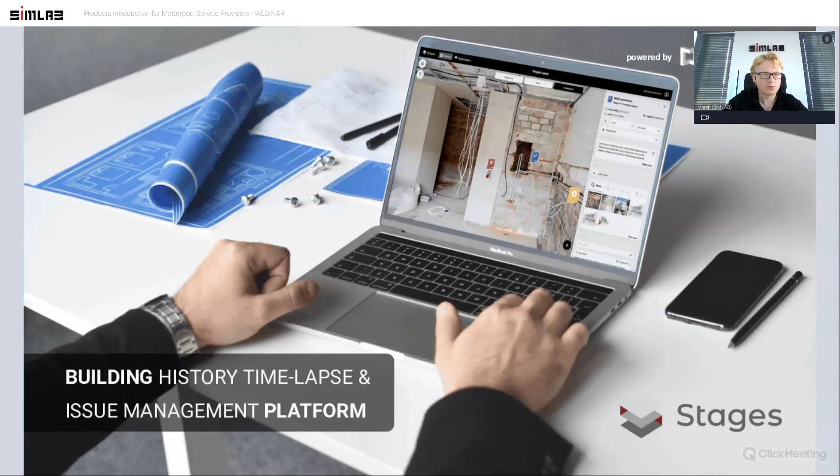If you're feeling that Stages and SIM-ON is a good part of your future business, we're gonna be more than happy for you to use it. For why to use Stages, for who it is, I'll just drop that part. That's something you might need later on to talk with your customers in written form, but you will see it live in a couple of seconds, so that's going to be more obvious to everybody.

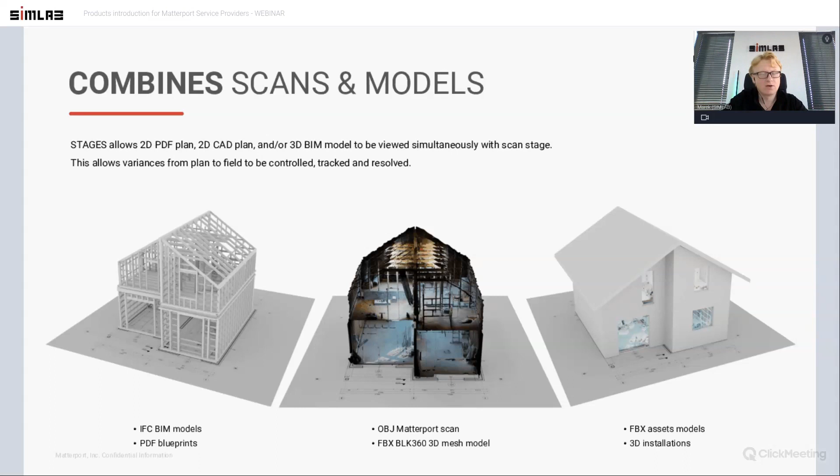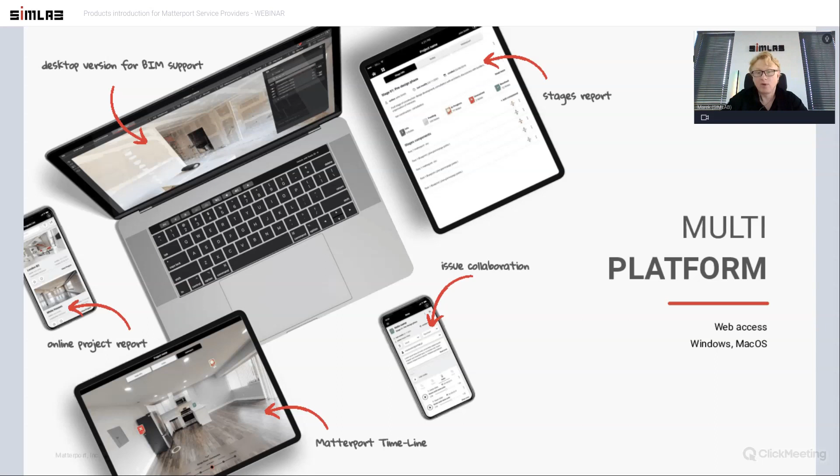Those slides show the concept of Stages, the main perspective of Stages, and also for SIM-ON, how to work with this, what kind of geometries, what's the main concept, what kind of data files we're able to load into the system, that it's multi-platform regardless of the operating system, because it's web technology, you can basically use those lines.

Even in our materials, we show a full description of the products, which is very important, because as you'll see in a couple of seconds, in the next part of the seminar, the product owners, and in this moment Robert, will show you the main difference and answer your questions about, for example, web version and standalone version.

That's what we have listed. Again, because of the time shortage, I don't want to go into the details, but I'll show you basically what's the main difference, and all those kinds of basic questions are answered in those materials, on the links my colleague has just copied to the chat window for you.

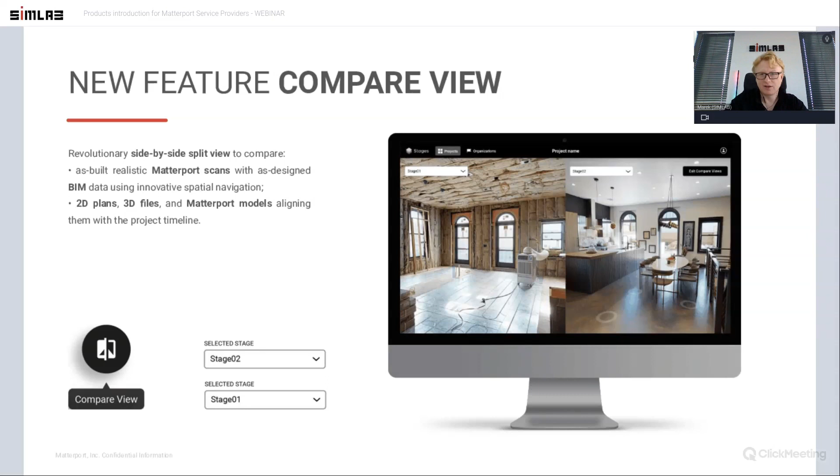The most useful and important features are all listed, so you don't have to worry how to talk or what arguments to use with your customers. It's in those materials. The most important thing, which I'll show you in a couple of seconds, is the split screen, which is the main hype and buzzword around the Matterport environments that we're hearing about and getting emails from you about, but this will be presented.

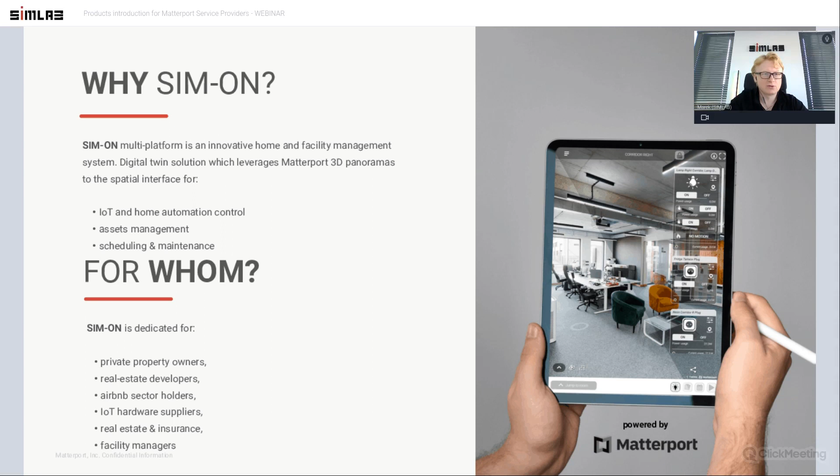The same colorful, nice marketing materials are prepared for SIM-ON. As you see, there's a lot of place to put your logos on those materials. So start using this. The same questions and answers, why SIM-ON, why it's needed, and for whom it is.

It's everything there. Although I'd like to show you that right now, because of our experience, we know that SIM-ON is also not correctly branded as the IoT or home automation system, because as Ivor has already mentioned, this is a system to run your facility on a daily basis. So there's a little bit of confusion. It's still one product, but if we're talking to customers who mostly work in facility management, we tell them that SIM-ON's got a facility management module and an asset management module.

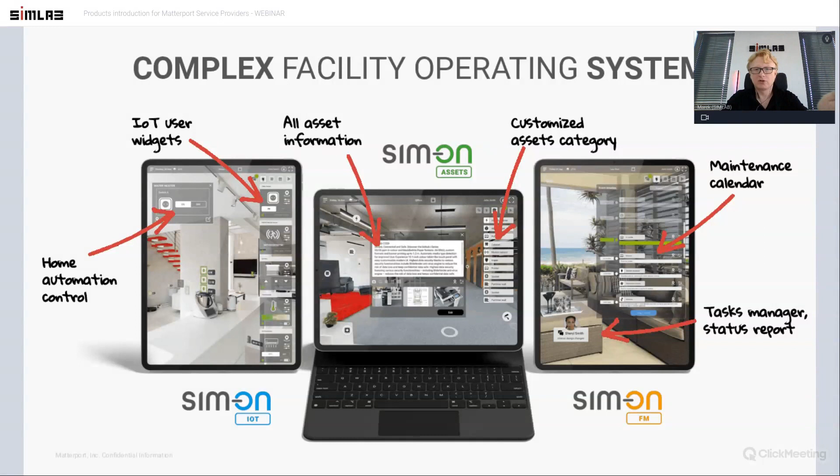If we're talking with, for example, service providers who are doing home automation installations around different regions in the world, they are mostly interested in IoT or home automation. So yes, there's a SIM-ON IoT version of it, although everything works in one bundle under the SIM-ON brand, and there is no additional pricing or cost for using FM, assets, or SIM-ON IoT. It's all one software, it's just about correct targeting and positioning the product on the market if we're talking about FM or asset management.

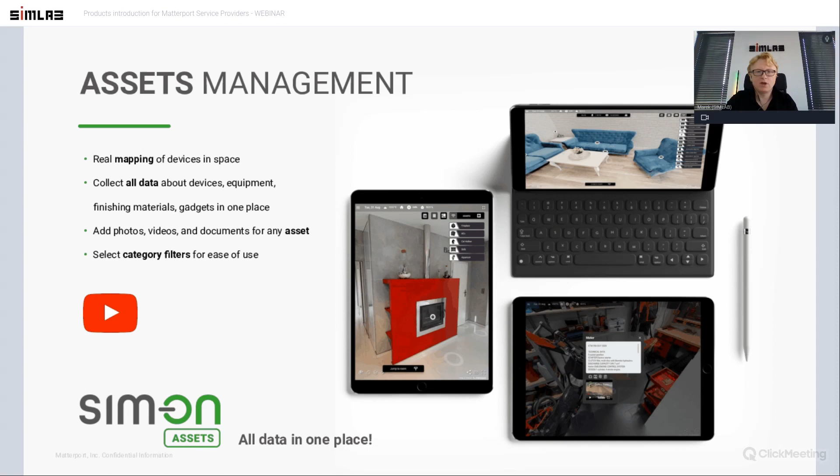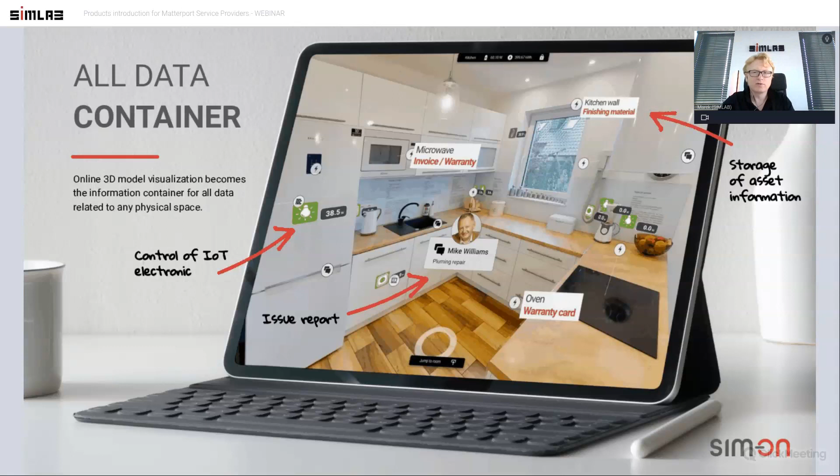So these are the benefits of each module, according to the materials. Everything is in the materials, once again, for your usage. You can click it, go through it, use those links right now, or just keep it with your materials. We are trying to make those graphics as universal as possible, so you can actually create this yourself.

Of course, for each of the products we have plans - subscription plans, enterprise plans - and also a concept for how to work with Matterport service providers to use those plans and share, for example, the revenue. But for that, I would like to come back to those slides.

At this moment, I would like to show you basically how the products look like, and what Stages and SIM-ON actually are, for those of you who are not registered yet on the platform and haven't seen this before live. Because seeing this in a video is one thing, but actually clicking through it yourself is another story - the ease of use of the software and toolkits is our biggest benefit for the end user, for the consumer, who gets a 3D Matterport model and is very excited with that model.

He can rotate it, put some tags, send it to family, send it to business partners. But the excitement of using those models drops down over the next couple of days, and after a couple of weeks he even forgets that he has a beautiful 3D digital twin of that facility. So to bring back this excitement, we created a product which allows you to use Matterport 3D scanned data for the full life cycle of the building.

From the very first beginning of construction, which is Stages, but also during daily operation, which happens during the daily activities of using IoT systems or facility management, and events where you need to change the filters in your air conditioning units - everything is held in our software.

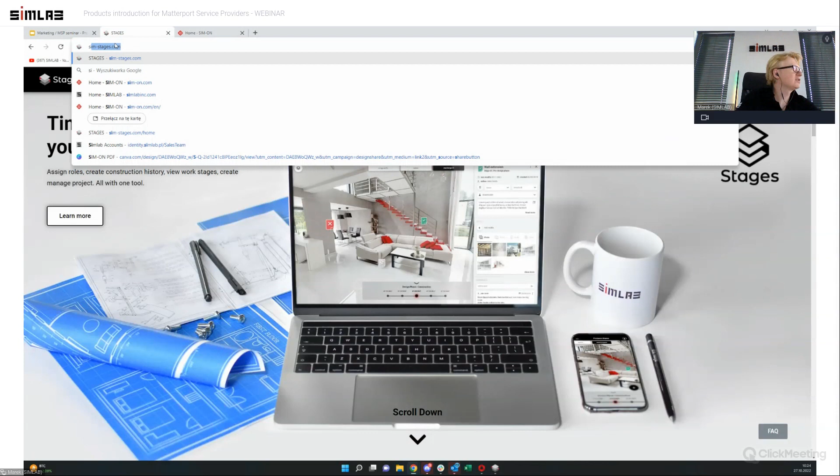So Stages - if you would like to try it, even right now or after the seminar, it's very easy. Let me just show it again. You go to sim-stages.com, and this is the landing page, which brings you straight to the product.

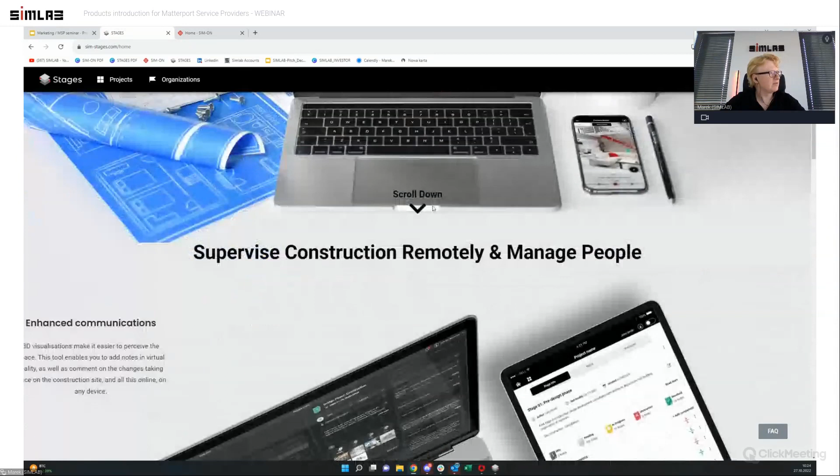The landing page is complete. It shows you the biggest benefits, some materials that you can copy from, some movies showing how it works, additionally some graphs and how to even start it. The basic tutorials, how to do the first demos for your customers or the first applications, are there. The differences between Windows, which is the desktop version, and the web version are also there, as well as the subscription plans on the website.

So it's a complete set of materials, but the most important thing is that the magic happens once you log in - this is my computer that I use on a daily basis, so I'm already logged in, but here in the top right corner there is a button to go straight to the login.

And once you log in, you see those two beautiful icons. One is projects, where all of your scanned data is held, and organizations, which allows you to share the same models with different collaborators in different companies working under one project on different levels and stages of those projects.

So let's go very fast, not to waste too much time. This is your dashboard, showing the projects created by you or shared with you for collaboration. Let's take the one I like most - this is one of our colleagues' apartments, and this is how it works when you actually load it in the first stages project. Everything is web-based, and there's a small button on the top left corner which opens the stages.

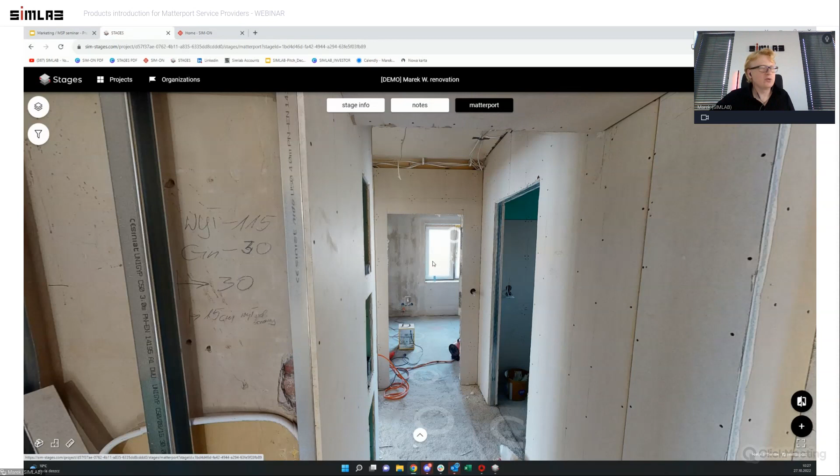One is called information - when this time frame was captured, you see it's the 19th of April 2022, when it was last modified, who was the author of the scanning, what's the description, and what kind of problems it shows. But the most important, of course, is the Matterport for all of us, because we are Matterport service providers. The reason we don't show Matterport at the beginning is that if you're on a construction site, you don't want to download a couple of megabytes to your mobile device. If you don't have a Wi-Fi plan with you, you just want to show what's happening on the construction, and I'll show you in a second.

So how the Matterport model works - I don't have to explain that this is a 3D model in a web browser, which is a revolutionary technology. But what's most important for all of you is that here, if we're in the Matterport model and we bring back the same stages description window, you can actually select the next model captured about the same facility, and it moves you in time to that particular model, staying in the same place and location.

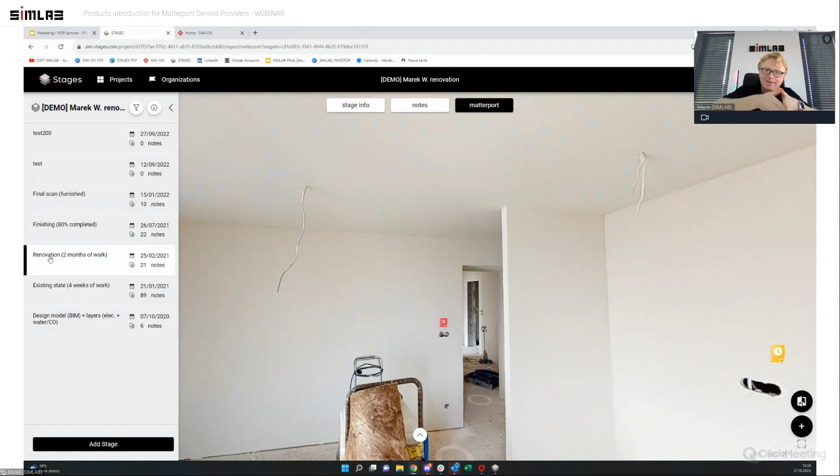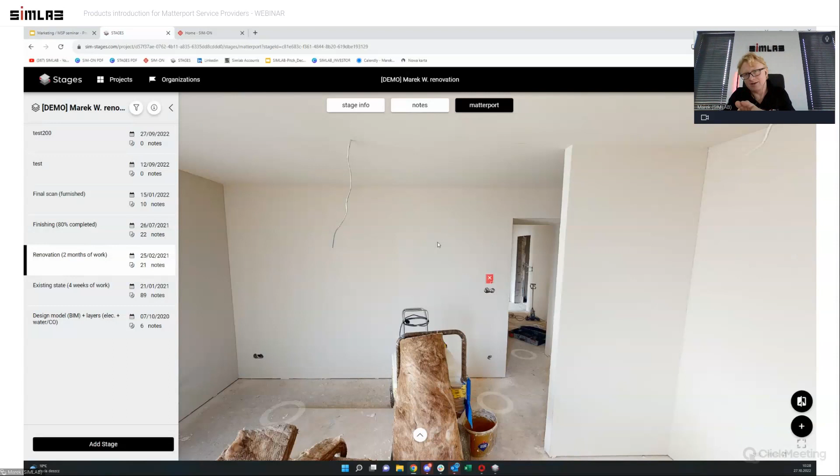So you see here I was looking at that wall, which had no gypsum boards yet, so I could see all of the installations, cables, and so on, and I was just transferred to the next model in the same place. And talking about the same place - it's not the same spot of putting the camera, because it's the closest one to where we were in the previous stage, but with the same focus of the camera and angle of view that I'm actually looking at.

So if I'm, for example, looking at that balcony window and I select the next one, you see the progress shown, and that's actually showing what's happening with that facility over time. You see the paint is being done, we have some first furniture coming in, and the lamps are in the facility. So this is basically how stages is named, because it's stage 1, stage 2, stage 3, and you can build a full life cycle of the building like this, even showing the aging of the building, or before and after an insurance removal, insurance problems captured before and after a disaster, or any kind of claim to the facility.

But that kind of jumping, it's one great story.

What we released a couple weeks ago, and some of you may have found out on social media, is a revolutionary new way of comparing scans with a split-screen window, this icon at the bottom. It brings up two side-by-side windows showing Matterport stage 1 and Matterport stage 2 of the same facility, and everything is synchronized.

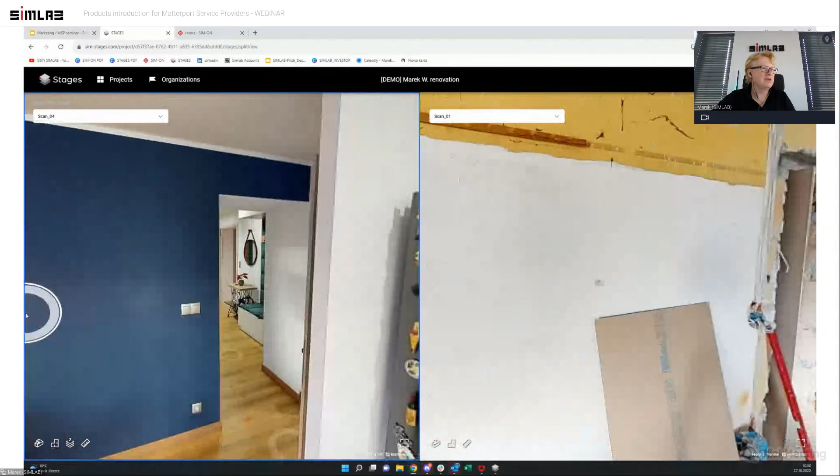Let's go to scan 1. This is a great example showing before renovation, where the cables are, and after renovation. Everything is synchronized, and this is something Matterport service providers were asking us for, so they can compare side by side with different models. If there are 20, 30, 50, or 100 scans of the same facility, it's easy to select the one that's interesting for you.

The synchronization of the walkthrough images in the Matterport model is seamless and works very smoothly. This is the biggest advantage for Matterport users who have more than one scan of the same facility. So this is basically how it works.

If I'm here in the corridor and want to see where the cables for installation are in the wall, these are the Superman eyes you can turn on to see how it works — it shows what was laid down before the wall was closed. Using this does not require any engineering knowledge, and creating an application like this with this effect also does not require engineering knowledge. Everybody can build these demos.

In the last session, Robert, who is the product owner and manager of the Stages product, will show you how to build this demo with 3-4 scans in just a couple of minutes. That's how easy it is.

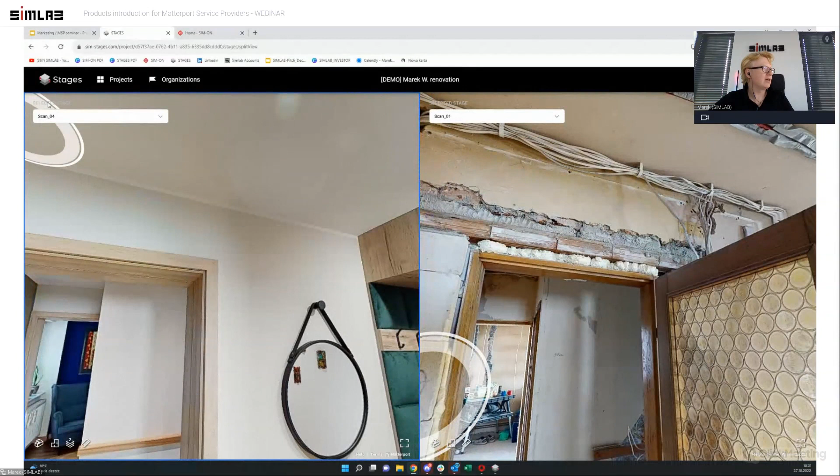So I can walk around the apartment and see how it was before and after, using a timeline shown on the left side panel, or with the compare view as shown here. That's basically why it's called Stages and what Stages does.

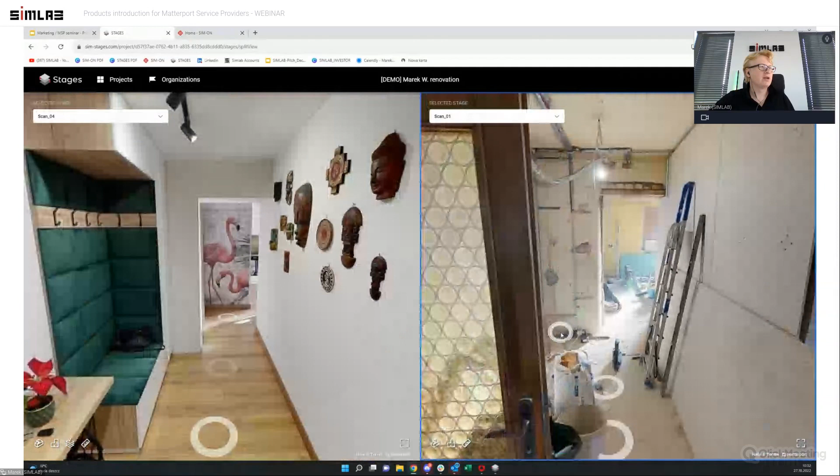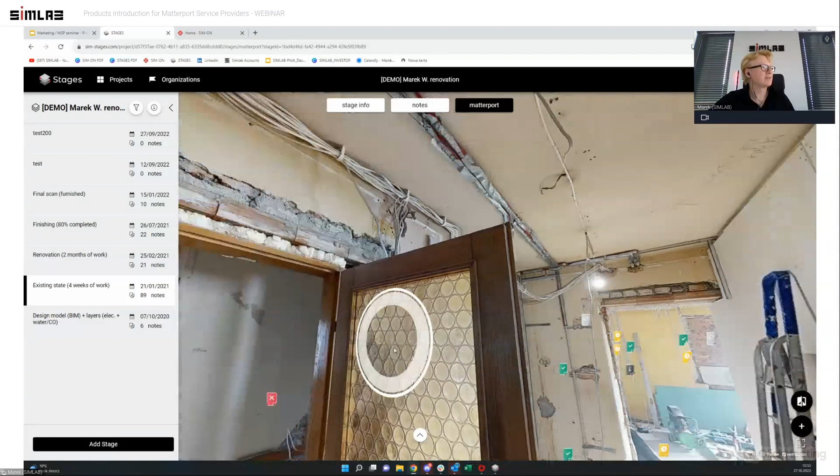Let me close that view and go back to this construction site Matterport Digital Twin 3D model — you see I'm still in the same place. There are a couple of navigation methods: one is the left side control panel, but also, since it's touch-enabled, touch screen navigation in Matterport is pretty useful.

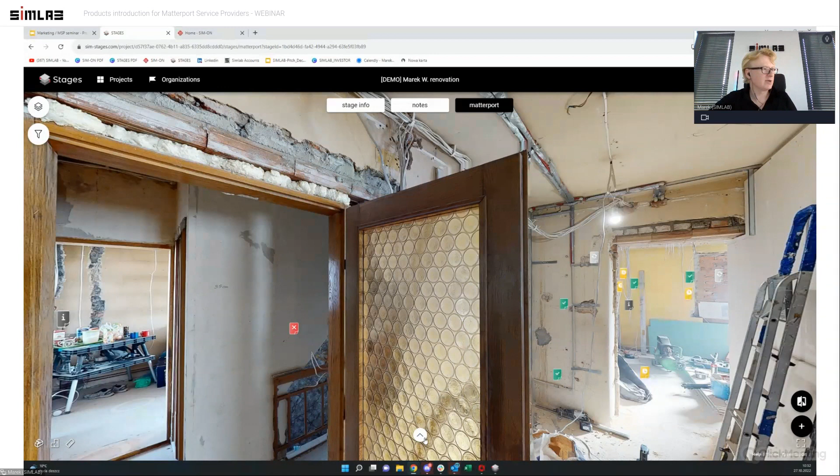You see here that there are stages laid down as points in time on a timeline — that's why we call it Stages. This is often referred to as Matterport timeline software, Matterport timeline feature, or Matterport time lapse, which lets you jump between those points just by touching the touch screen.

What else is important about Stages is that it's not just about moving between Matterport models of the same facility — on top of that, we created a very advanced collaboration system that allows Stages to be used by everyone assigned to and who is a stakeholder in that particular construction, renovation, or insurance claim project.

There's another big feature here: the plus button in the bottom right corner, which brings a new feature to Matterport users — an issue management system. If you're thinking about the Matterport tag, this is like a tag on steroids. Just look at what I'm going to do here.

Let's say something is wrong with this outlet — it's missing. You can allocate that issue in 3D space, like this. You see there's an information icon, because you can select whether you want to report this as a problem, an issue, or as information.

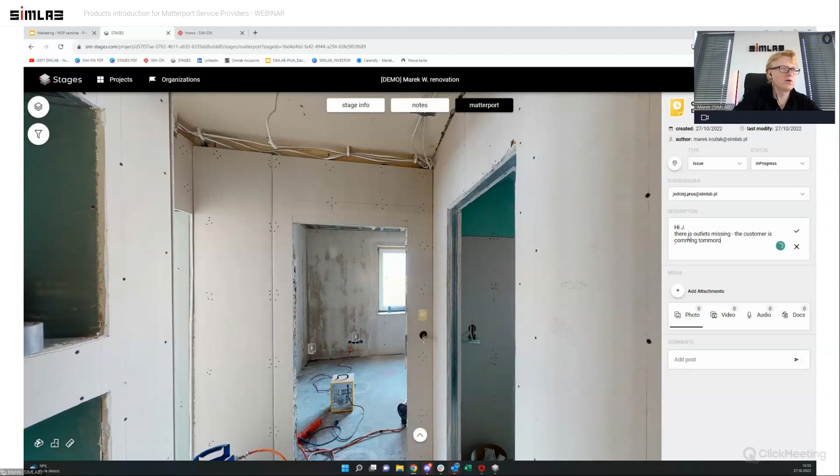Hi J, there are outlets missing. The customer is coming tomorrow, please fix it. Please ignore my English mistakes if there are any.

So I'm adding this, and the coolest feature in that functionality is that now we can add attachments, whatever you want - pictures, videos, documents, PDFs, as many as you want, to have an information layer about that particular AC unit, giving all the warranty cards and instructions to the customer with the handover of the stages to the next owner of the building.

But the most useful right now is adding pictures, because that's very fast and easy, and I can do it with the cell phone camera using stages on the site.

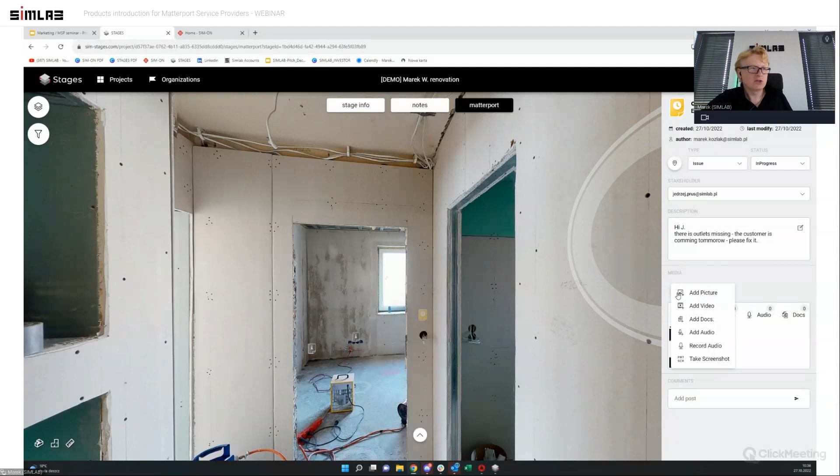But the coolest feature here is record audio, using the microphone on your cell phone - like I'm talking to you now - saying, hey guys, this is very, very important, please fix it as soon as possible. You can put a name to it, like outlets in corridor, and then save it to your library.

So you see it's being added on the go to the cloud. At the same time everybody else logged into that particular model already sees this data. So it's constant and very fast, rapid communication.

But the third coolest thing is that now, inside of Matterport, I can do this kind of zoom-in camera mode on that particular issue. I can put a screenshot name like outlets missing in corridor and take a screenshot - but a screenshot with this draw option.

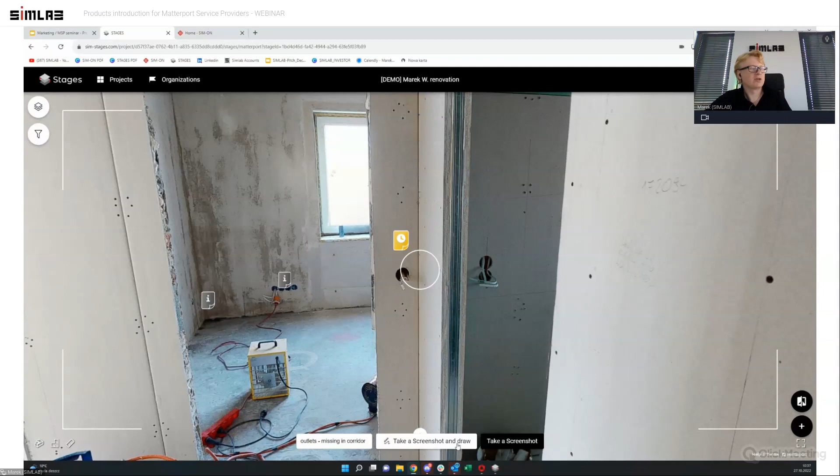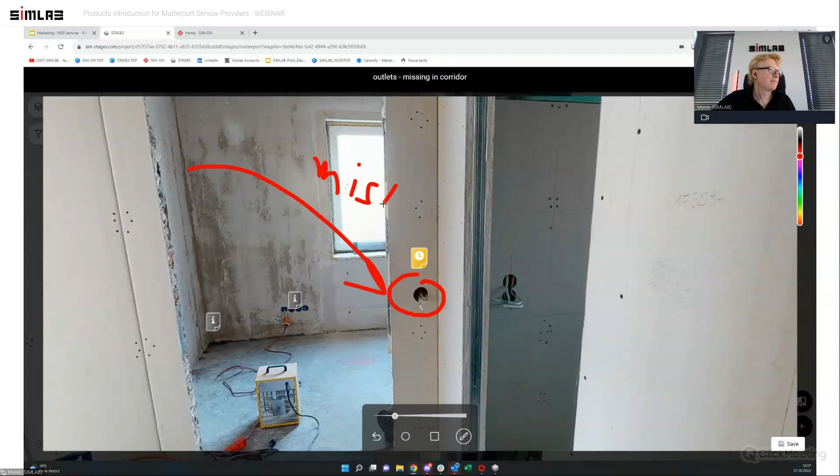What it does inside the Matterport model is bring up this small control panel where I can select shapes and so on. But let's say like free painting - I can draw like this and put 'missing.' Sorry for my handwriting - missing.

So with a save button, this is a quick way to add notations that customers can make in Matterport right now and build a library of issues.

So if your digital twin with Matterport brings you all the data about your construction progress or how it looks, this is how you mark issues inside Matterport with your finger on a touch screen.

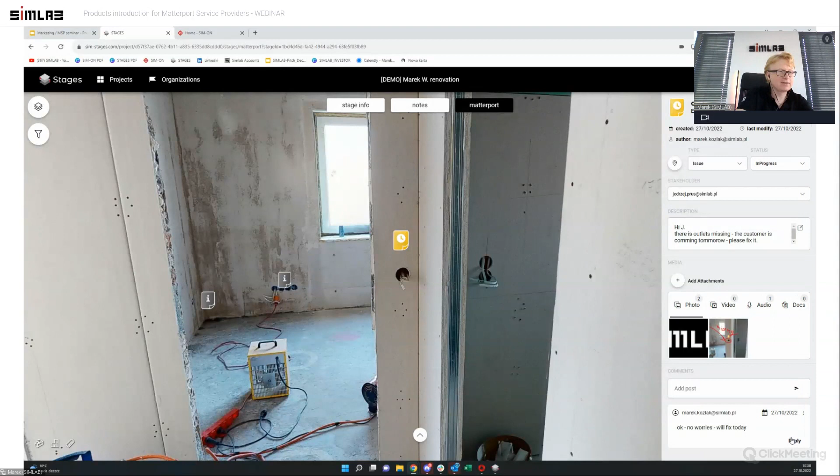And if Jędrzej - sorry for this difficult name - gets this problem report, he can say, okay, no worries, we'll fix it today. And this is documented, because now I, as the owner of that problem, can report this to the stakeholders and make all the correspondence.

That's how all the information is reported and saved, because the third magic button here, the notes, creates a full report of what's happening in that facility. So you see I just noted 'outlet is missing' with a date and my name, and it's actually adjusted and saved to the report of what was happening in that particular facility.

So construction teams, or facility owners - not product owners, but facility owners - this is how they can communicate with many collaborators using Matterport technology.

And of course you can filter this through the facilities. You see in this one there are 19 notes, 22 notes, and each of those notes has their own location, which is obvious since it's a Matterport model, but you can filter those notes by status, by person, by subcontractor, by answers at that time in the construction process of the building.

And this is a very complex system that allows you to put everything about the process of building, aging of the building, or removing insurance claims into a Matterport environment, which is very visual and doesn't require engineering knowledge. So that's basically how Stages works and has been constructed.

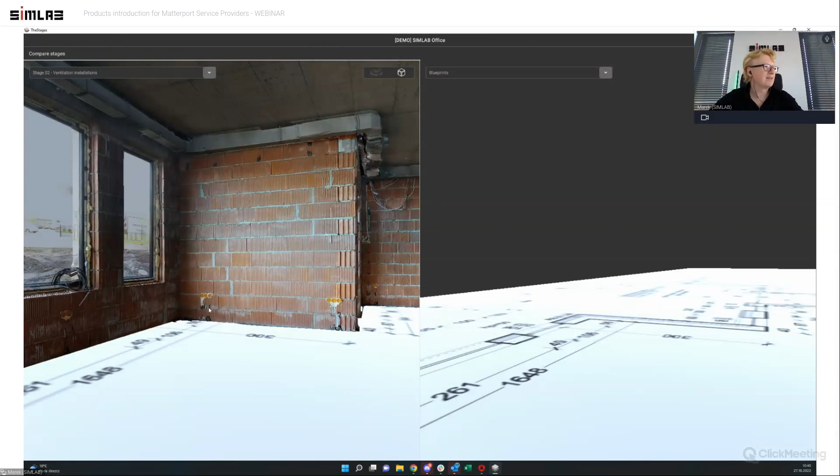So as you see here, now we have a Matterport OBJ Matterpak data, which I can walk through freely in a 3D space. There's a construction timeline, the same one you could see on the web version. But the main difference here is that if I go to the compare view, I can compare this 3D Matterpak model with anything else in the data, because a desktop holds 3D models as well. So you see here, a 3D model from Matterpak which I can compare with blueprints, or I can compare it with, for example, CAD models.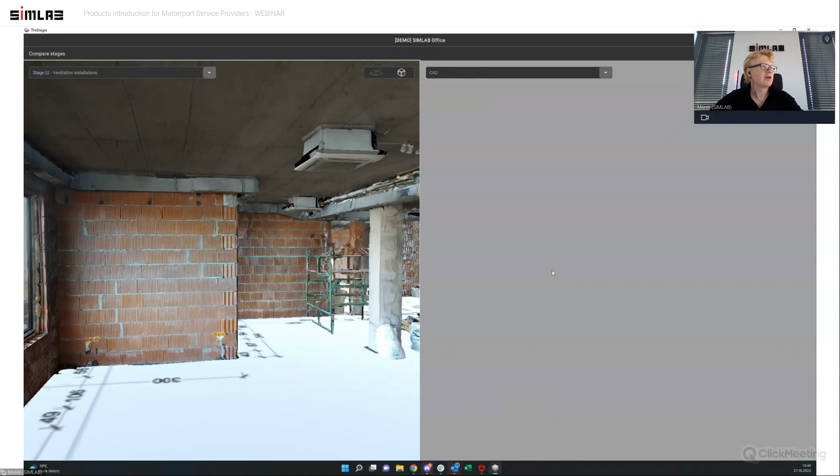Which is coming from engineers, as designed versus as built. Then I can compare that, for example, with another stage.

Let's say that flooring stage, which has a little bit more mess, some devices coming, but I can compare it also with 360 panoramas. So you see on the left side a 3D geometry, which can be CAD or Revit data, compared with 360 panoramas.

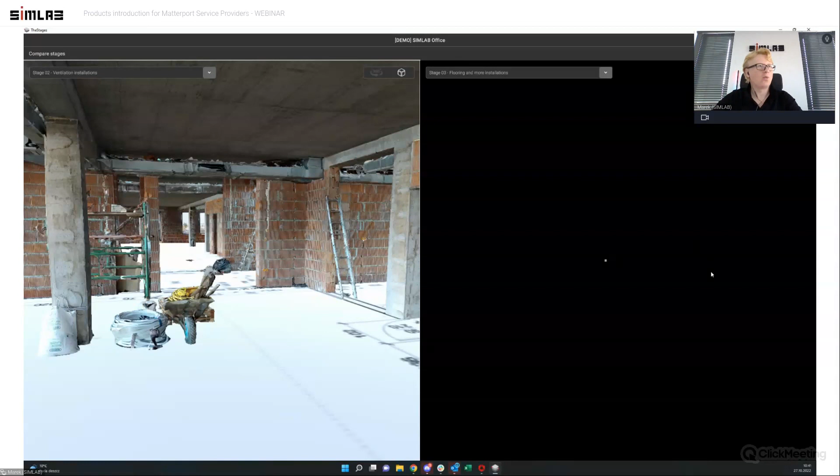Everything is synced in one app, one system. So you see here this is a Matterport model, and on the other side I have a Revit model. That's going to be very cool. If I go back to the CAD, you see here I'm moving in the Matterport, and the Revit model is being adjusted to what's happening.

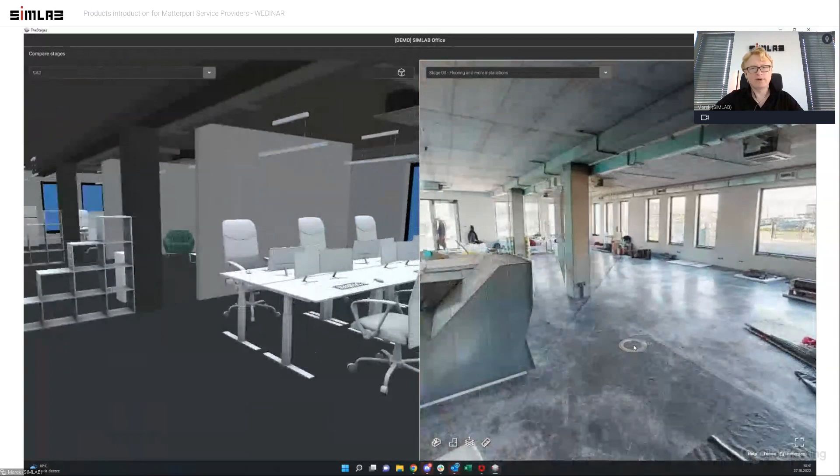So that Stages is desktop, and I guess we can answer more questions about the product and desktop web differences to Robert at the end of the session. So that was how it works with stages.

Very quick about SIM-ON, because it's much easier to explain. Here it goes. So the next product is for when you have your facility already working. Again, the product has a full website with tutorials, materials, how to start, and demo projects.

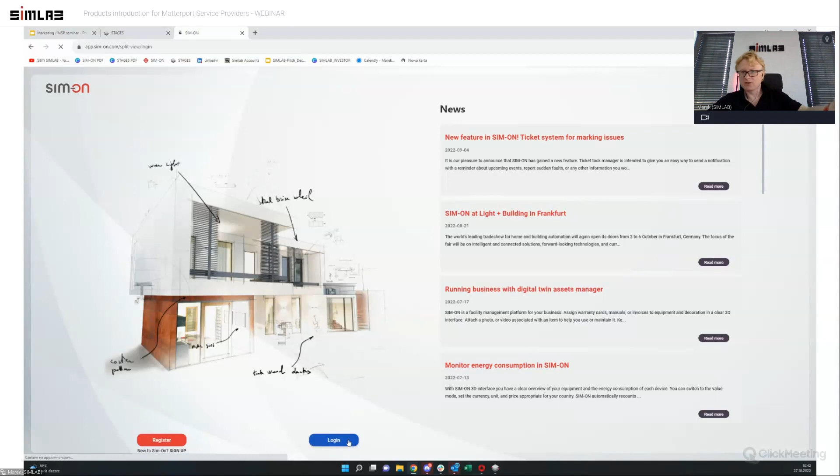When you log into the application, you are inside our administration system, which gives you information about new product updates and so on. But once you log in, it also gives you access to the facility that you have access to. So let me go very fast to the office that I am right now in.

So it's our SIMLAB office. And again, a Matterport model is being loaded, and the Matterport model is used as the container for all of the data about the facility. So as you see here, this is a Matterport walkthrough, but right now we have those three modules that we were talking about before.

And as you see here, there are some icons, but those icons right now are our IoT and home automation connected systems from many vendors and providers, which allow you to connect lights on and off, which I just actually switched off at my colleagues sitting in the room next to me, just to show how fast and how reliable it is.

So behind me, there is this LED light with a small icon in the exact XYZ location in the Matterport model, showing that it's a 2.2 watt consumption. So I can open the control panel, and in a couple of seconds I can switch off and switch back on that RGB light.

Also, there are a lot of widgets showing basically the closest devices next to you. So as you see here, it can be light controls, plug controls to control your electronic devices, but also the same for motion sensors, temperatures, and everything connected inside the Matterport models through IoT devices.

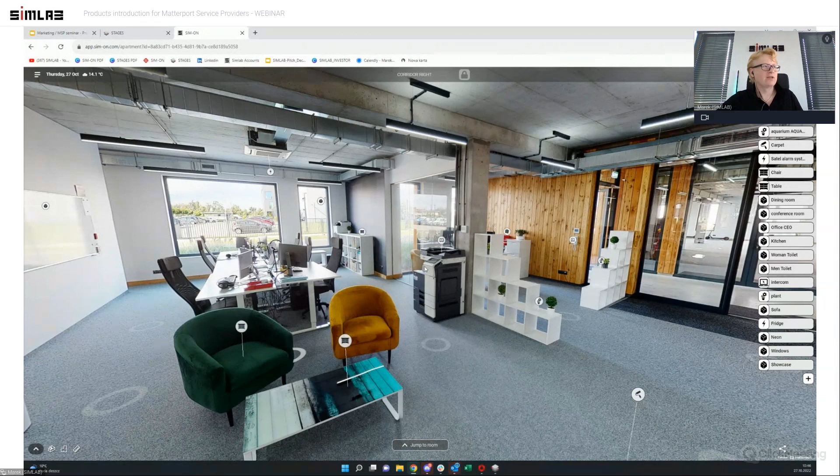Going even a step further, remember we put a date to some of those assets, like end of warranty. Let's go to the next icon. Now we have the SIM-ON FM system, a facility management system, because on this small timeline it shows you the next and past events coming from today to the following days, and that can also be synchronized with your calendar, so you know how to maintain your facility.

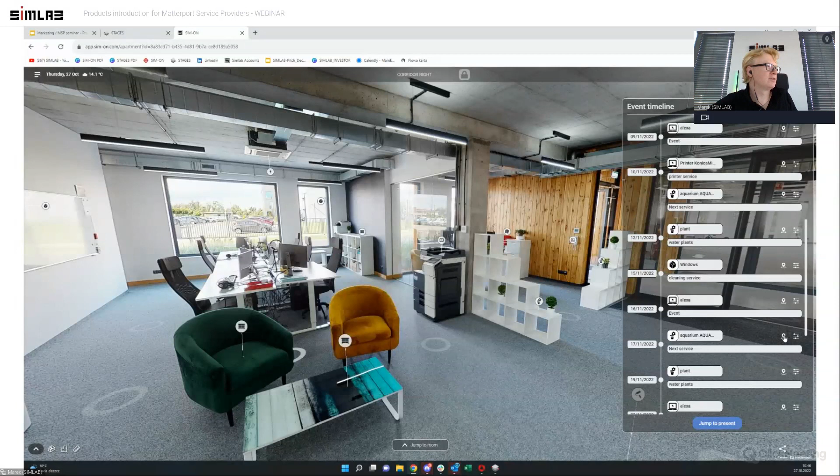Let's see what we have here - Alexa, some kind of event, aquarium, plants, Alexa, or printer. We were in the printer, so let's say there's a service coming to the aquarium. Where is the aquarium? Well, the aquarium is here. So when the service is needed, I can click it and see what's coming and what's happening. A small facility management system, connected and giving you the most obvious things happening in your calendar for that facility.

As you see here, now I have a next button showing some kind of dialog box. If you click it, it shows 'please fix.' That means if you have a facility management system, an asset management system, and a home automation system, now you also have a communication system with a collaborator of that facility, which can be a facility manager, showing what needs to be fixed.

Let's see - 'stopped working, please fix.' So we see there's a tablet to be fixed. 'I'm on my way.' As you see here, there is a full correspondence, the same as it was in stages, with a person who is a stakeholder of that building. You can also take pictures, tag an object, and create a ticketing system, like 'please fix my AC unit,' or 'the computer is not working,' or 'there's a leakage on the tap.'

That is being shared with as many people as you want, using Matterport as the container for this facility data. This is a question I get a lot - people ask, 'I don't want to go from one part of the office to another just to turn the lights on and off, because that's pointless. I want to do it fast, and that needs to work fast.' That's why we have those assets as widgets on the right panel, so you can arrange your own order of the most important things.

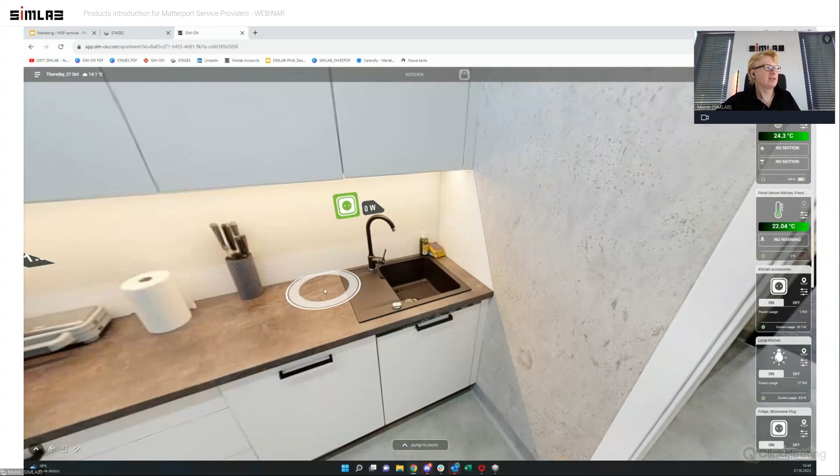The good thing about this is that each of those icons, whether it's a skyscraper, airport, big building, or even residential for like 200 square meters, each has got an XYZ location through the Matterport model, which we use as a container for all the data happening around that facility. This is SIM-ON and Stages, which we envision as the home operating system, where your building's history, issue management, facility management activities, assets, and home automation layer are all integrated into the Matterport model.

That's basically how Stages and SIM-ON are being constructed. So knowing this about the products, what's the difference between them, how they work, and how easy they are to use - let's go back to our presentation so we can describe what we can do with those.

So now, the question would be: how much does it cost? It does not cost much, because we charge per seat, both for Stages and SIM-ON. Stages, for private or small business use, we charge $45 a month as a subscription plan per user. So if you have a big construction site with like 20 people working on it, or maybe a bank, insurance company, or architects involved, that's $45 per seat if the person needs access to the facility.

For that, we also have enterprise level customers where we want to push them towards more fixed prices, with everything paid per year. Depending on whether it's a small business or an enterprise customer, we can have different types of pricing. So we both actually earn money on that customer.

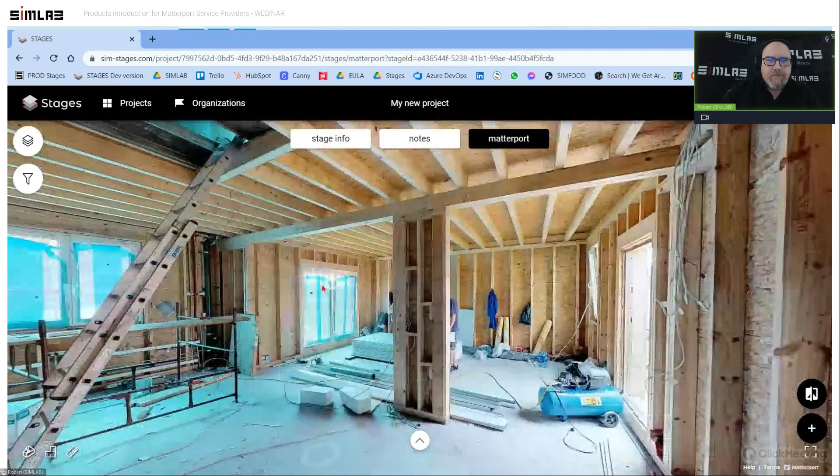This is the moment when we can add some notes for it. We can set the type of the note, just like Marek showed a few minutes ago. We can set up a stakeholder and the description.

Speaking about the notes and the issues, it is one thing that is worth mentioning about it, because some changes in the notes are... how to say.

For notes, we prepared email notifications for some operations on the notes. For example, if I set someone as a stakeholder, the person will get the mail with this information. The author of the note will receive the email information about the changes in the note, for example, about changing the status, adding media, or adding a comment, because as you can see, at the bottom of the dialog window, there is a place for comments.

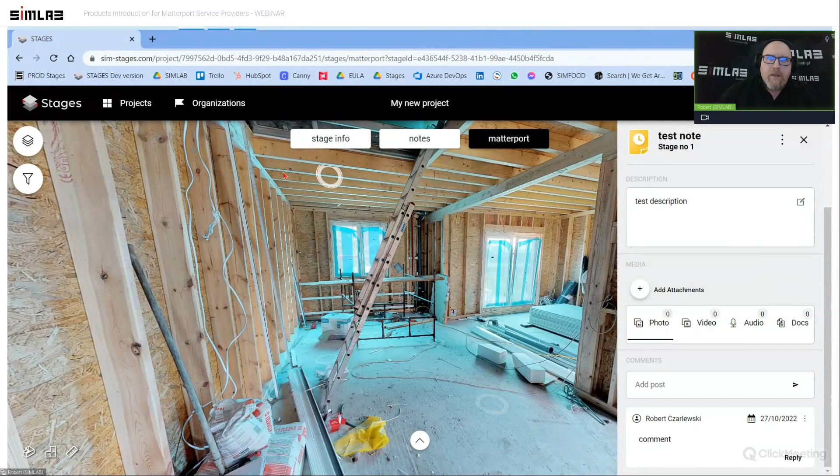So the author of the note will be informed about any changes in the note by email. All notes are collected and displayed in the Notes tab, and in case when the notes have their own localization, for example, like this.

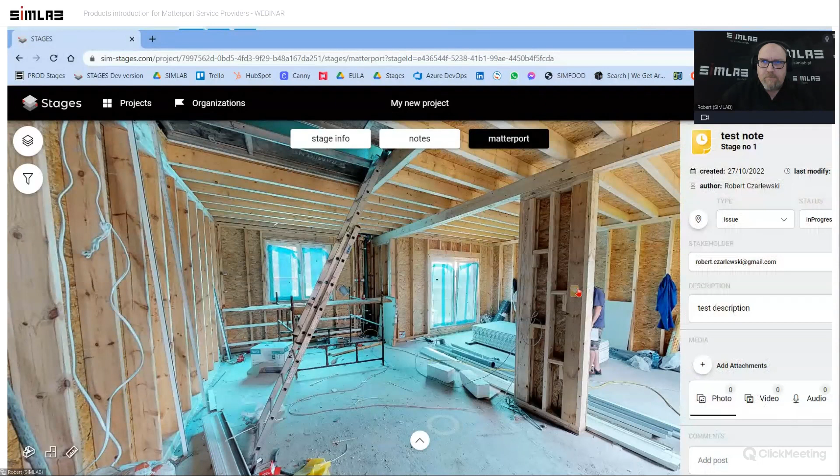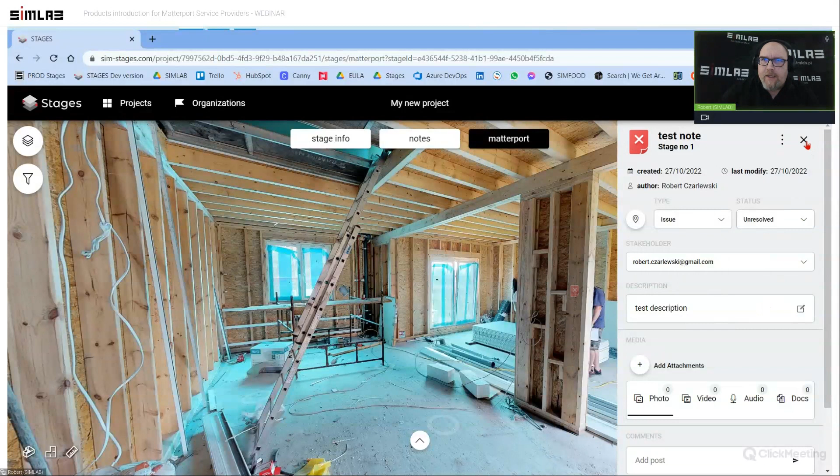This is the localization of the note. As you can see, this is the yellow marker, meaning this issue is in progress. We have color coding for the statuses of the notes - for example, resolved is green, and unresolved is red. If the note has its own localization, clicking on the navigation icon moves us directly to the note of the Matterport scan.

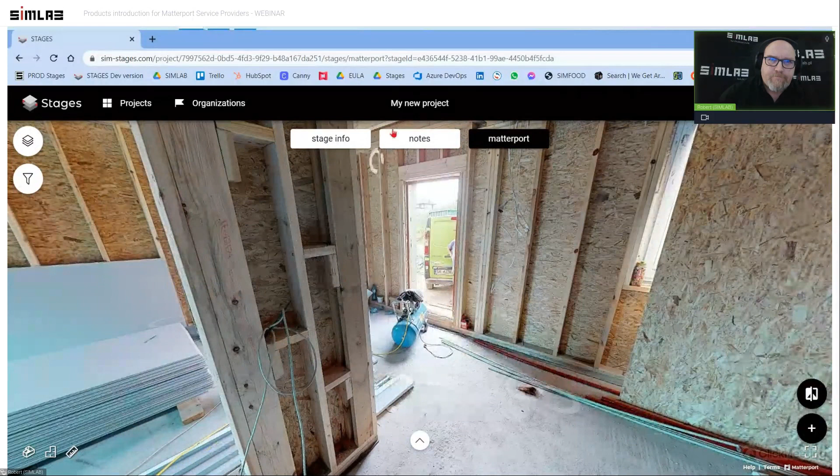Okay, this is about the notes, creating the notes, creating the localization. Let's get back to organization for a while and the users, because I would like to show you how to invite users to our organization.

We click the button Add New User, put the email address of the person we would like to invite, choose the role, and point to the project for the invitation. At this moment my colleague should obtain an email with the invitation, and in his selector of organization a new invitation for organization and project should be marked. I point to my invitation.

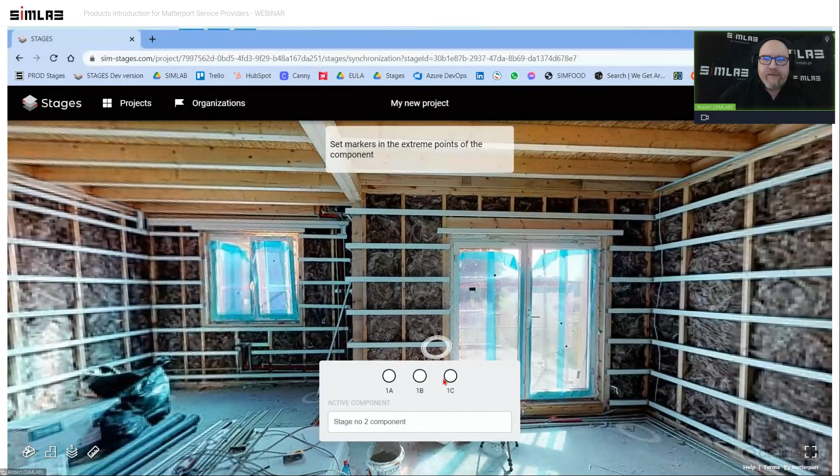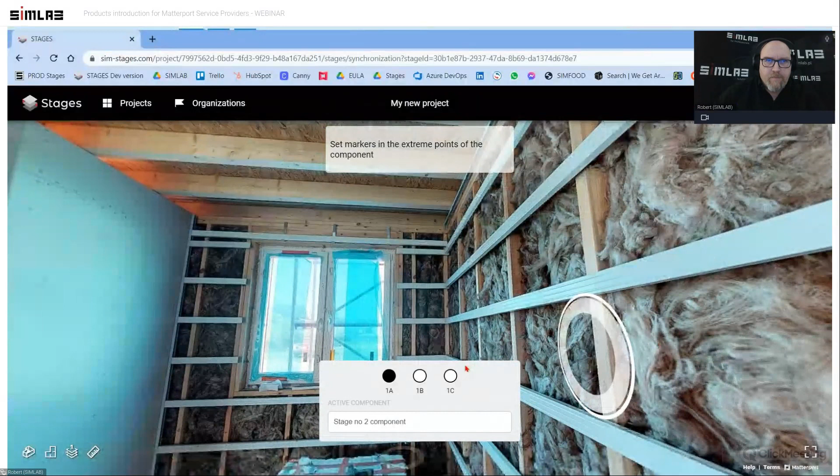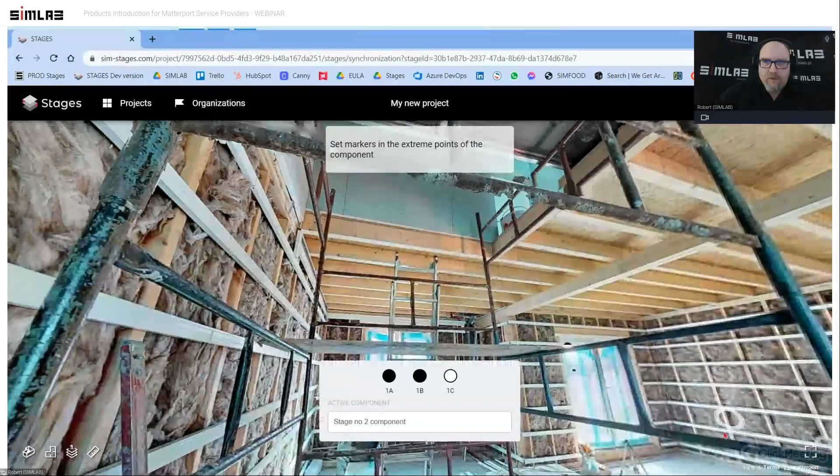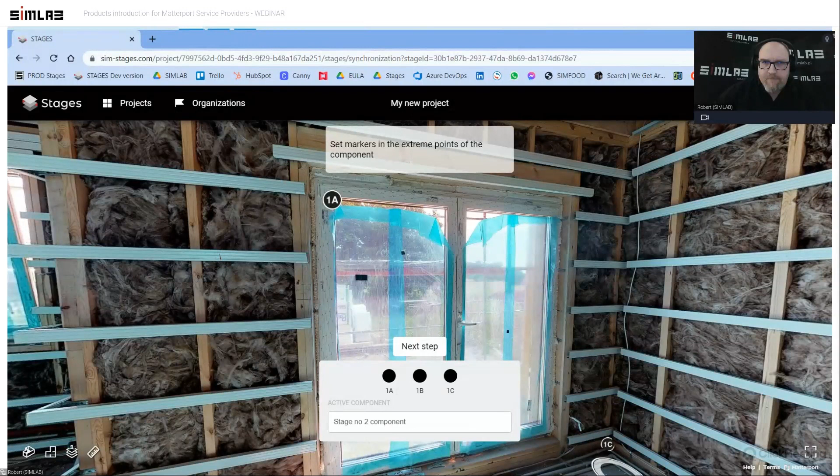The whole trick is that we have to set 3 unique points on the one stage - point 1A, point 1B, and point 1C. Now we're choosing the next stage, which is already synchronized.

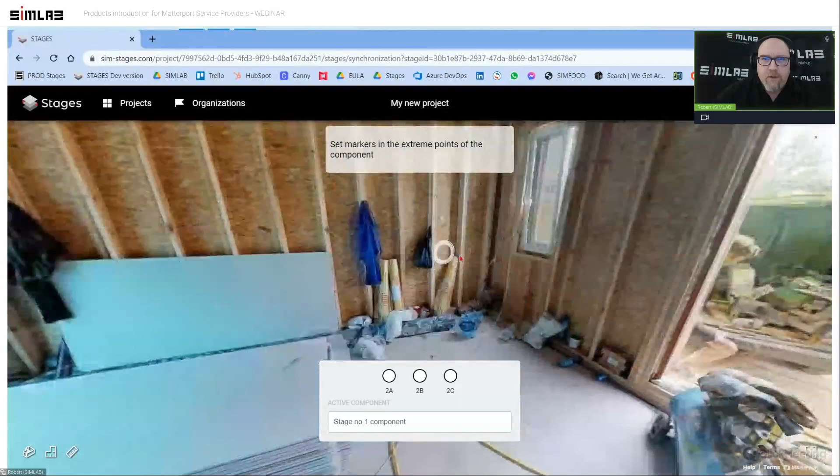We're repeating the process. We have to mark exactly the same points we set at the previous stage. So when I click those white fields, it will show me a little hint here. I can click it and it shows where I placed the marker for synchronization on the previous stage, so I can put it in exactly the same place.

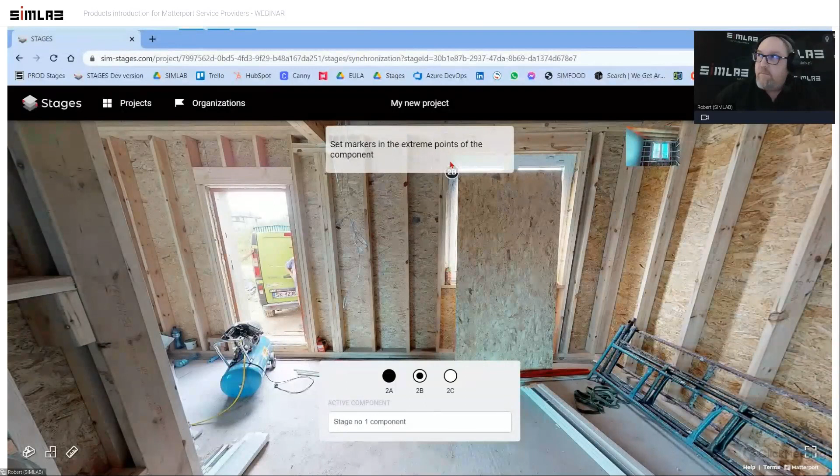And the last one. Okay, we're accepting synchronization. As you can see, the first stage and the second one are synchronized. That means those two stages will be shown on our timeline.

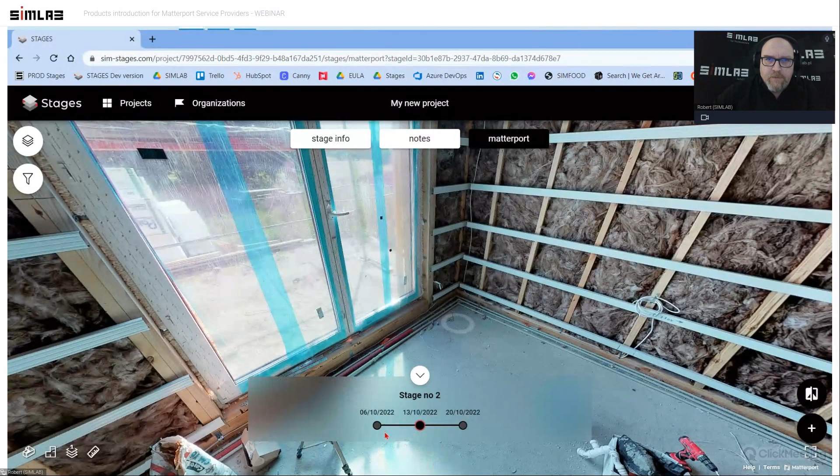This is stage 2. And this is the first stage. When I'm moving between stages, I'm still standing in the same place. Or you can just show it on the compare screen - this is the best way to show that everything is synchronized. Of course. Stage 1. And stage 2.

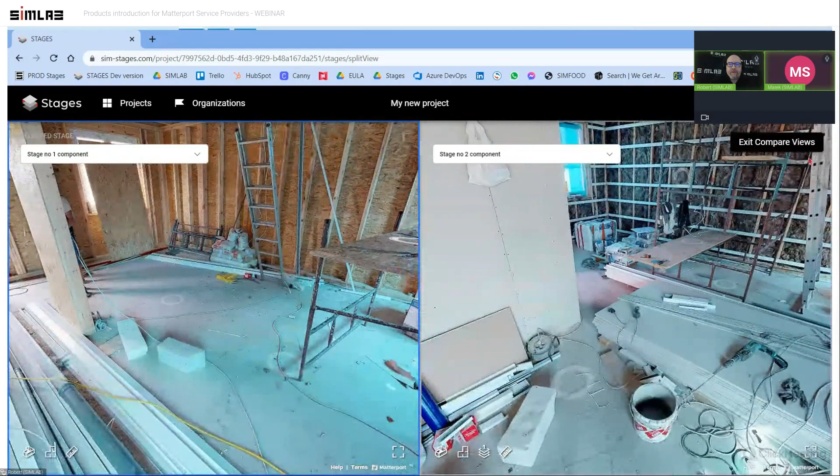Okay, Robert, because our time is shrinking a little bit, let's stop at this moment and give the words to Michael, okay? Sure, thank you very much. If any more questions come to Robert about how to do something in the desktop version, we can address it in the last Q&A session. Okay, thank you, Robert. Thank you, Marek.

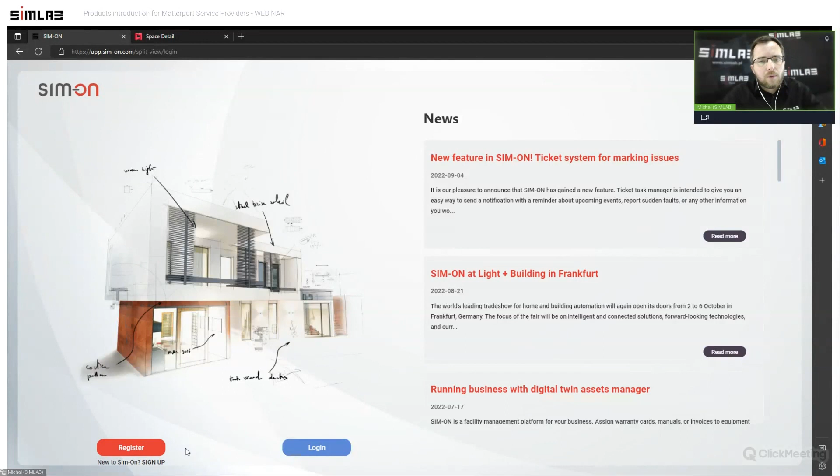I will try to make my part of the presentation very fast and smooth, because the configuration of the SIM-ON process is also fast and smooth. First of all, you need to go to our webpage, sim-on.com, and there you have the login button on the app. You need to register your account in our cloud. I'm already registered, so I'm clicking only login, and I have the first view and first screen of our solution.

First of all, I need to add a new property. How do I do it? By clicking add new property, and I need to fulfill some information about the property, like the MSP webinar test, some address, zip code, and the country is obligatory. For example, I will try Switzerland.

Next step, I have to choose the configuration method for importing the rooms into our solution. First is importing from the provider - if you have some IoT provider, you can click this one. If you haven't, and you want to create custom rooms only for assets, tickets, and some other facility functions, you can click create custom rooms and then manually put information about the rooms into the system.

In this case, I will import from a provider, for example from the Fibaro IoT system, but you can also do it with SmartThings and the Schneider Electric Kinetic system. As one of the participants informed us, we are only on the pre-production servers right now - we are waiting for production as well. To connect to Fibaro, which is a Polish IoT manufacturer, in the nice company part...

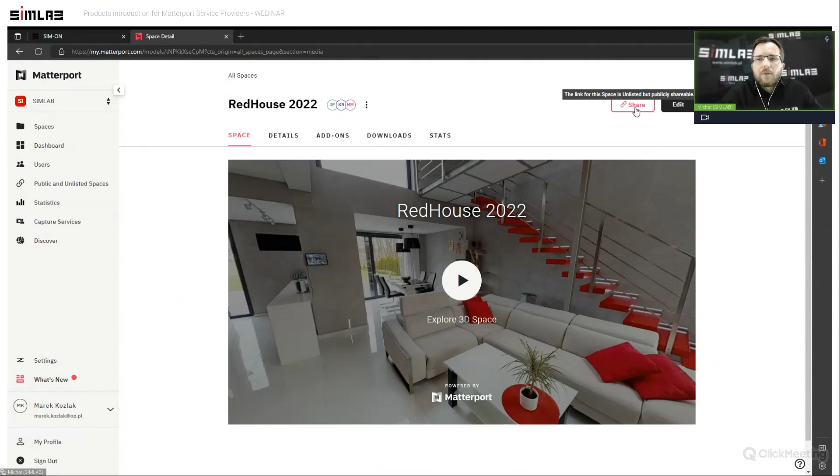To be fast, I can click select all rooms, or only choose one or two or three. It's up to me. After that, I select all rooms, go to the next step, and here I have the place to put the Matterport link. I choose one of the links for the houses, click Share, copy the link, and put it here.

Now I have the preview. To be sure that the link and the scan are good, I can move around here on the scan as well. And going to the next step, I have the project summary and confirm the project.

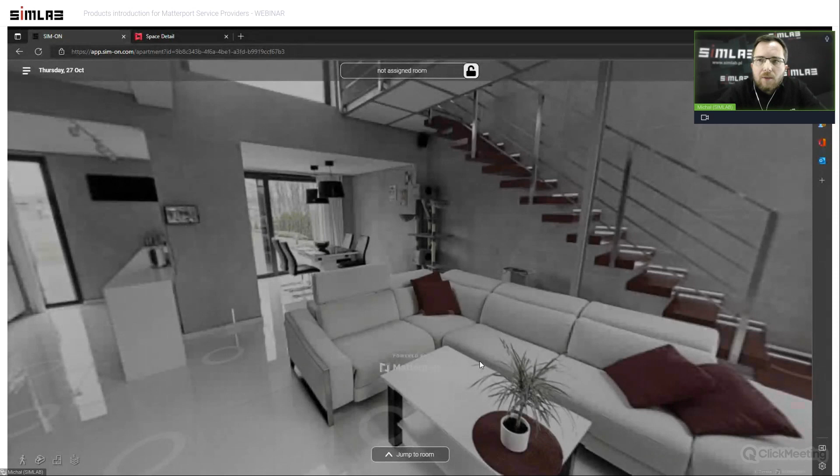And now all the magic is done, and we have the new project on our apartment. Next step I need to do is add the sweeps, the places where the camera stands on the scan, to particular rooms.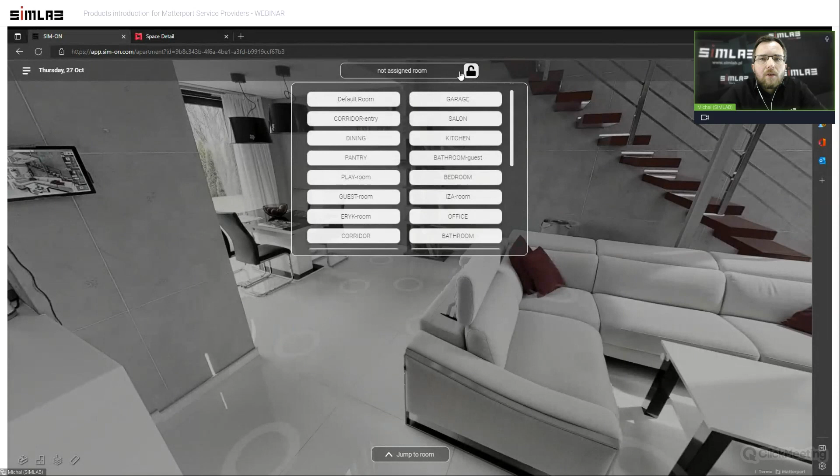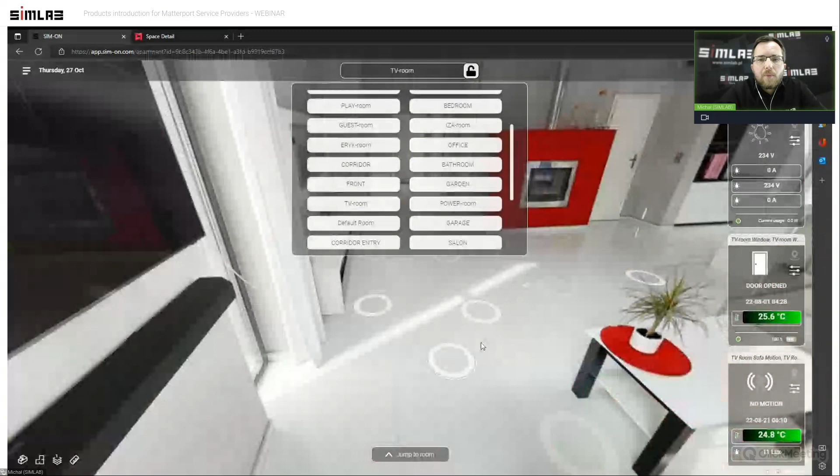For those, I need to click this key lock icon on the app and choose the room. This is the TV room, and I'm choosing this one. For all the sweeps I need to do the same thing, but it's very fast. As you see, I have 4, 5, 6, and for the whole property it takes a couple of minutes.

When we have the sweeps already assigned, as you see on the right, I have all the devices already imported, and I can put them into the walls. The devices on the right will change according to the location where we are standing on the scan.

For this one, I can put maybe a motion sensor on the wall, like that. I need to click on it. I have the pop-up menu, some pencil icon, meaning I'm going into the editing mode, clicking the plus button, and I can put the icon somewhere on the wall.

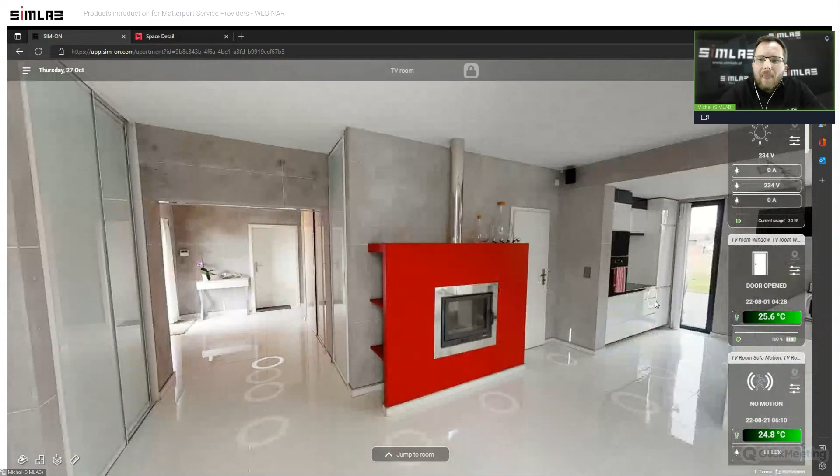The same thing is for the other icons, like for maybe some doors and others. This is one thing we can do. The second one is, okay, I'm on the wrong sweep. The second one is the asset menu, and it's working very similarly.

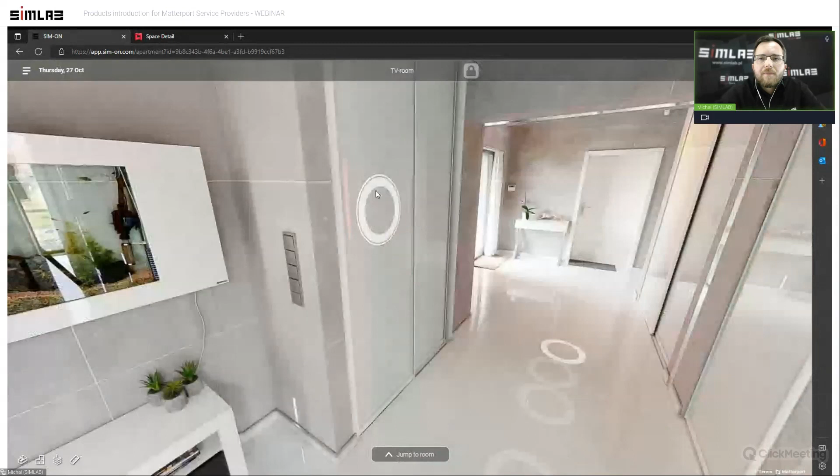We have here the add asset button. I can click this plus and give some asset name, like the plant. Adding the asset, and here I can also add some information about the plant.

Adding some photographs, like drag and drop files, or choosing from the Windows Explorer. I can also add the URL for YouTube or Vimeo, putting some documentation in Excel, docs, PDFs, like Marek shows you on the fulfilled asset, and also the event for the asset.

For example, this watering the plant event. The date, for example, for tomorrow, every week, once per week, and I'm adding this event, and this event is already added. Also, I can put the location, like that, for the plant, and I have done adding the asset.

The event which I'm putting inside the asset, I also have in the timeline. As you see, every week I have right now the event according to watering the plant.

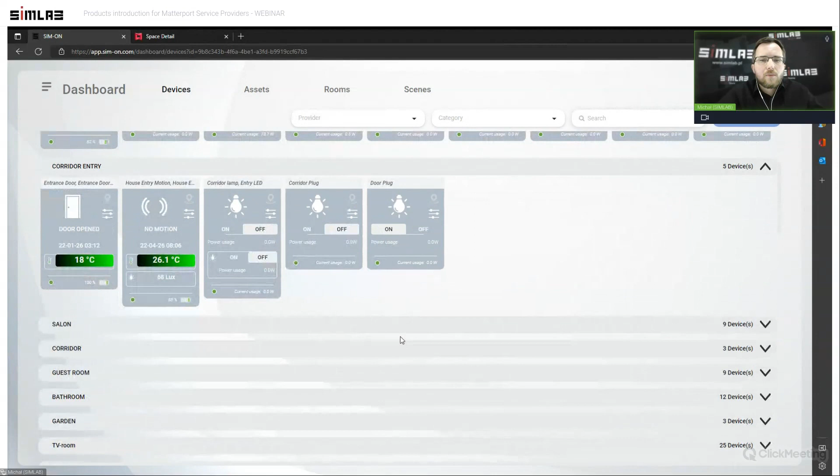All the devices and all the functions are also available from the dashboard menu. As you see here, we have this normal static 2D dashboard where we can steer and monitor all the devices we have in our apartment, as well as assets, rooms.

And scenes. Scenes is a very nice feature because we can build scenes in our software between different providers. For example, you have the Fibaro system, or the SmartThings system, and KNX. You can build a scene which combines both of those IoT providers.

First, we need to give some scene name. We can choose some icon, for example the bulb, putting some trigger, like recurring every day, at a time it will start, and choosing some devices from it. For example, this ceiling corridor LED light.

And then I need to choose the state the scene will go to after, and click the save button. And then every day at 11:37 this bulb will turn on.

Also, we have some very nice features about users and role templates. I will show you very fast. We can add roles for particular users for your property. For example, it can be your kid, your wife, or your husband, and so on. To do that, you need to add a new role and put in some role name.